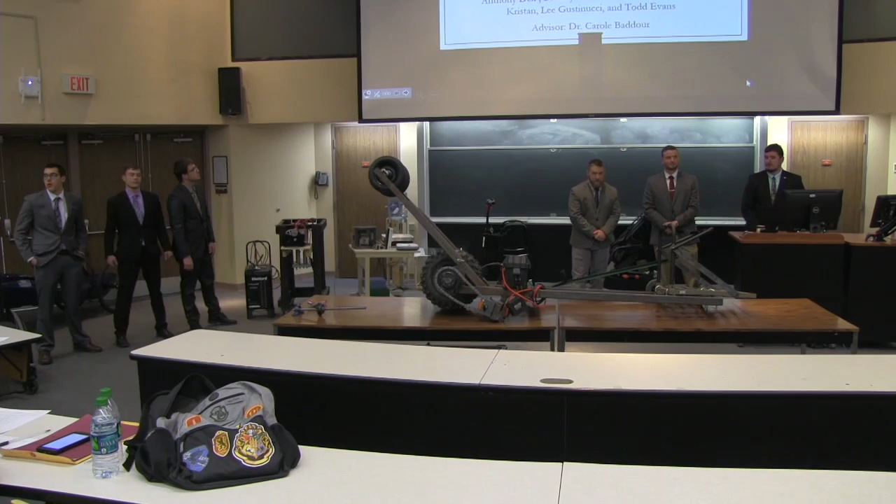The stands we have built, we wanted to create an electric-powered self-climbing tree stand platform. We're calling it a platform, not a stand itself, because it's a platform to hold the stand that each individual user would have too.

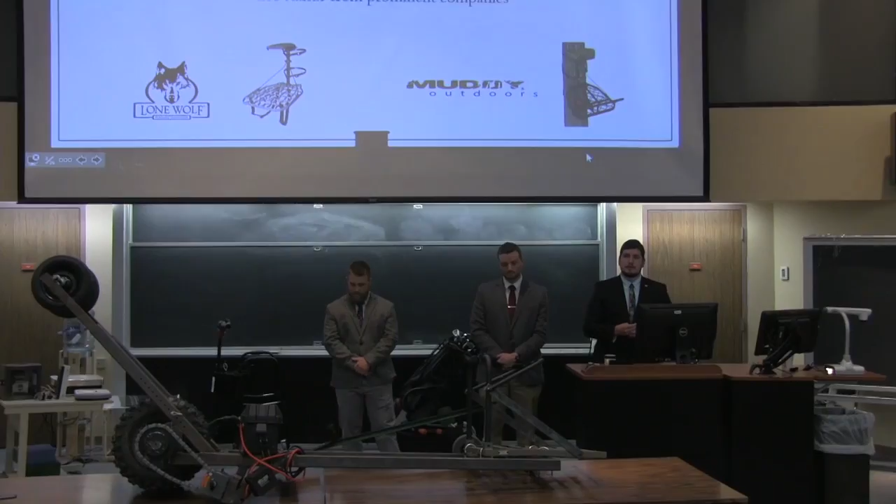We would like to be able to accommodate stands from prominent companies in the industry like Lone Wolf, Loggy Bayou, Muddy Outdoors, Summit. There are multiple different brands that make their own stands. Each is a little different, but our design is universal enough to accommodate all of those.

Today, there are 3 different major types of tree stands that you can use: ladder stands, hang-on stands, and manual climbing stands. The ladder stand is a ladder with a chair at the top of it, basically.

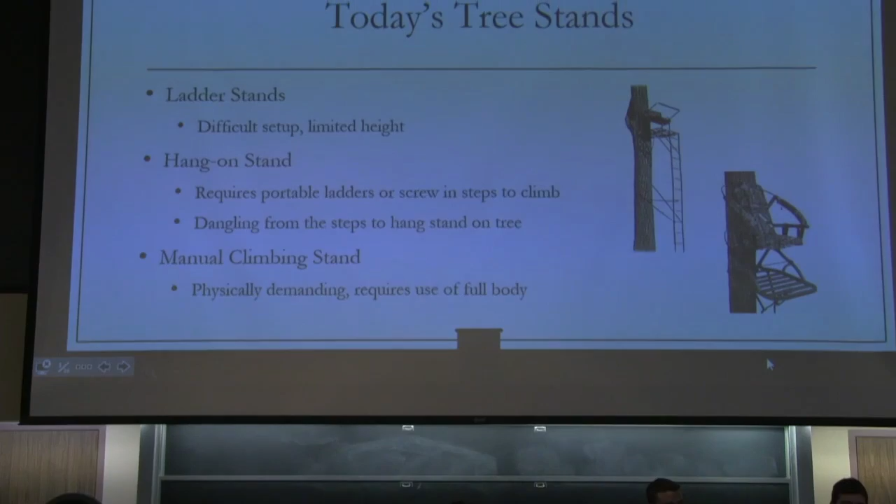You'd have to build it on the ground and then walk it, lift it, and walk it towards the tree, lean it up, climb up with it unsecured, wrap a strap around it. It's pretty unsecure, could be dangerous. Well, every stand is dangerous.

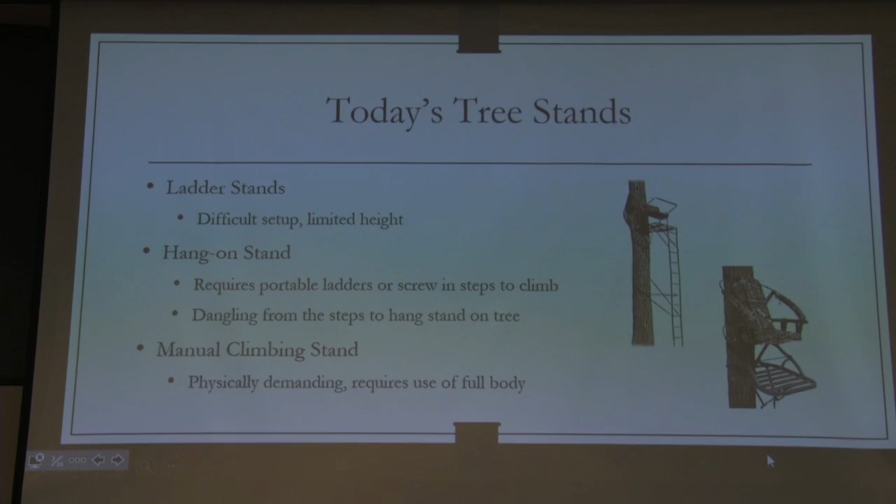Hang-on stands require the use of either screw-in steps or strap-on ladders or strap-on steps to climb the tree to your desired height, and then take the stand off of your back and hang it using a strap again. It's kind of hard to do.

Or 2-piece climber stands. There's a part for your feet, and then there's a part that has a chair on it. You would move the upper half using your arms, and then use your core strength and lower body to raise the lower half, to pretty much imitate an inchworm climbing up the tree. It's very physically demanding, and it's a little dangerous, but all of them are.

So to accommodate the tools used to hang other types of stands, we designed our Angel Lift stand, our motor-driven self-climbing tree stand platform.

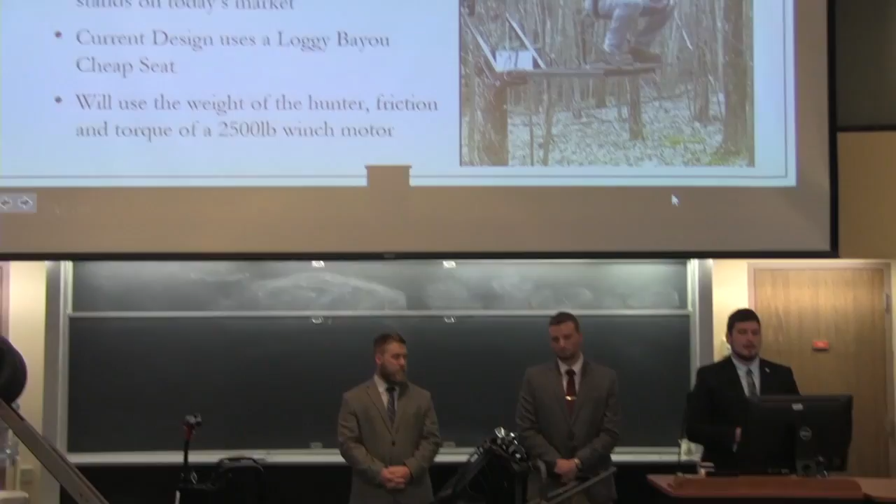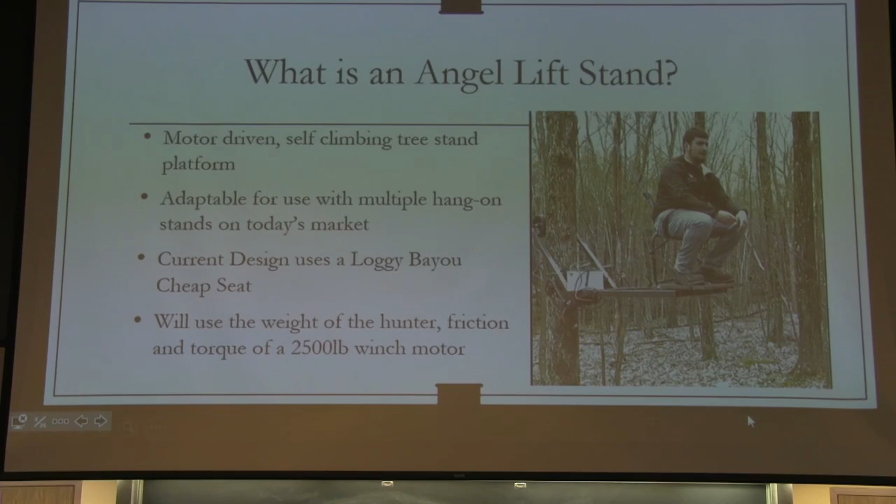We are currently using a Loggy Bayou cheap seat because that's what we had available to us. Most of the tree stands on today's market range from about $130 to $300.

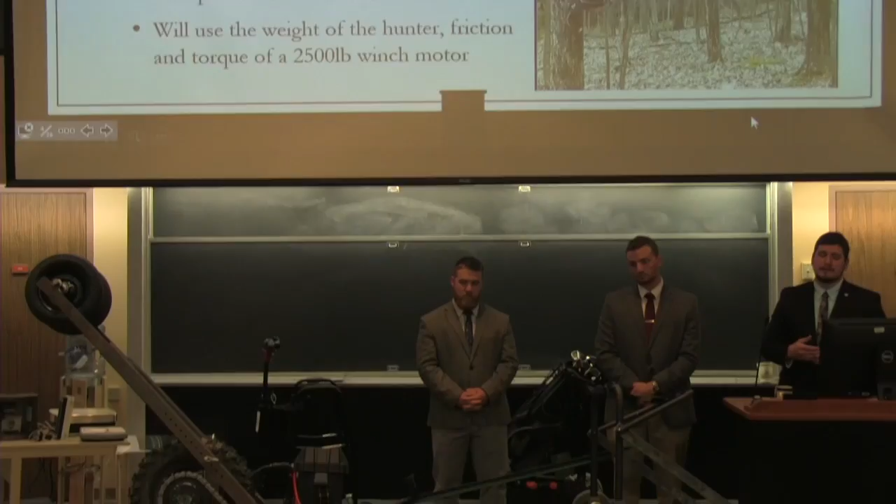It uses the weight of the hunter to apply a force into the tree, and that force into the tree allows the stand to climb itself up.

There's a picture there, I'm sitting on it. I'm only about 4 or 5 feet off the ground at that point, but it was raising me up. Me in those boots, fully dressed like that, about 270 pounds, so pretty decent weight.

So, just some specifications for our design. One of our goals when we were doing this project is we wanted to minimize the amount of damage that was done to the tree as it was climbing.

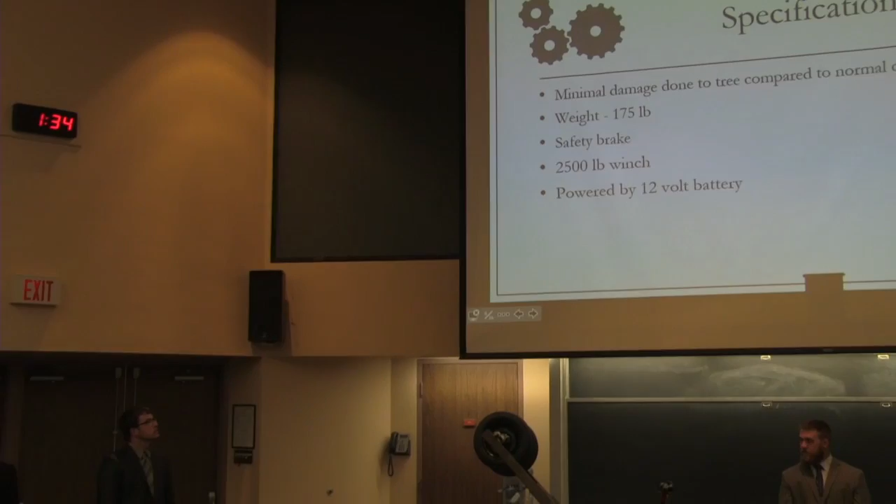And we were able to accomplish that compared to the stands that are on the market today. Bruce was mentioning the manual climbing stands especially do quite a bit of damage because they dig into the tree as you're climbing. Fortunately with ours, we were able to do minimal damage to the tree.

The tires, at the most, they scrape off some mark as it's climbing, but it's minimal. It's not something that's going to do any sort of long-term harm.

The weight of the stand ended up being about 175 pounds, so it's heavy as it is, but it's also overbuilt too. So we used big square steel box tubing because we didn't want to have to worry about structural failure. And we incorporated a safety brake too.

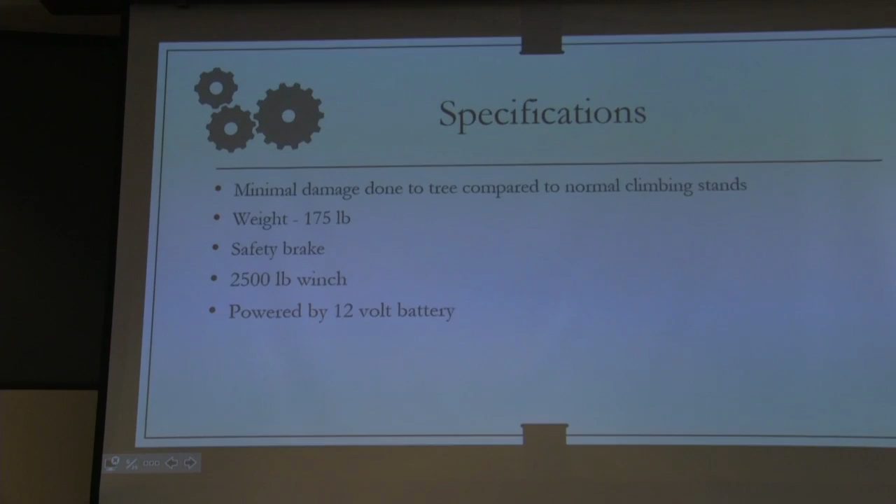So the electric winch has a dynamic braking system. So what that means is that as it's climbing, if you stop using the winch, the stand will stop as well because the winch has a built-in brake.

But we also made a safety brake, so in case anything goes wrong with the winch brake, you have a backup system and you won't fall out of the tree. And so the driving motor is the 2,500 pound winch, and that's powered by a 12-volt battery.

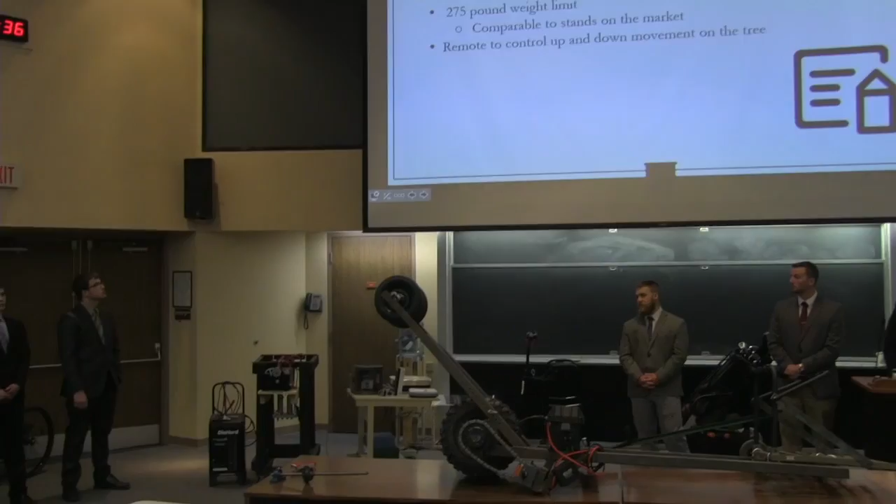Our weight limit is about 275 pounds, and as it's built, it's overbuilt, so that weight limit isn't because of structural limitations as it sits. It's actually because of limitations from the winch. If you consider the amount of torque required to climb the tree, you end up pretty close to the 2,500 pound capacity of the winch. That's why we have that 275 pound weight limit.

Structurally, you wouldn't have a failure as it's built at that point. And to control the winch, you just have a small remote, and you can go up and down with that. It's a little remote.

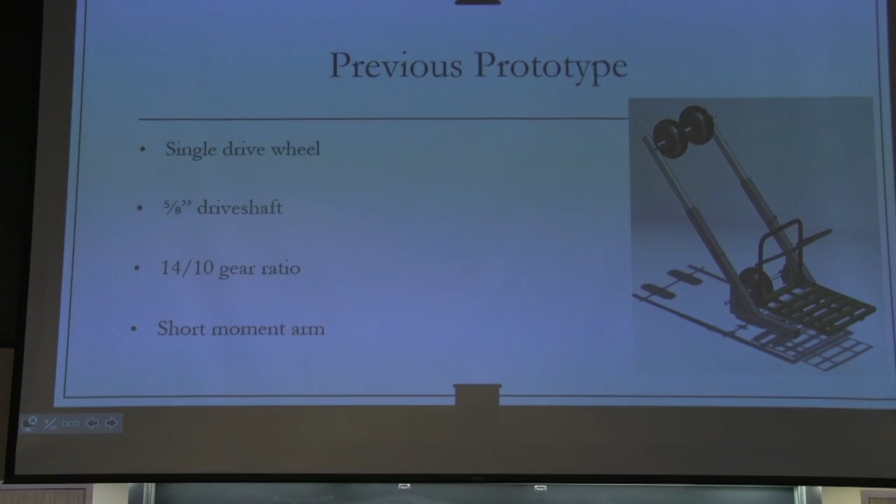Okay, so let's start getting into the actual design of the stand itself. This was the previous prototype that we debuted in the fall for those of you that were here. It started off initially with a single drive wheel design, mounted and driven by a 5/8 shaft made out of a round steel rod. We initially started with a 14 to 10 gear ratio, calculated based on the speed we were trying to achieve as it ascended up the tree. It had a lot shorter moment arm, or platform, which was probably the biggest design change you'll see coming up in the PowerPoint. We'll explain the reason for that.

It started out initially about 18 inches long, and you can see it on the tape out, fairly extended. Through our testing, we realized we needed a much larger moment, so we added that 4-foot extension off the end. We also found we needed more surface area to contact the tree, so we added a second tire. That also allowed us to have a centering function of the tree stand, which helped it become a lot more stable.

Along with adding the second tire, we had a testing failure with the old shaft, so we increased the diameter of the new shaft to the point where we were comfortable it wasn't going to fail on us. We added a brake, so that if anything happened with the chain or the sprocket, it's completely separate from the rest of the stand, meaning nothing will interfere with the brake stopping it.

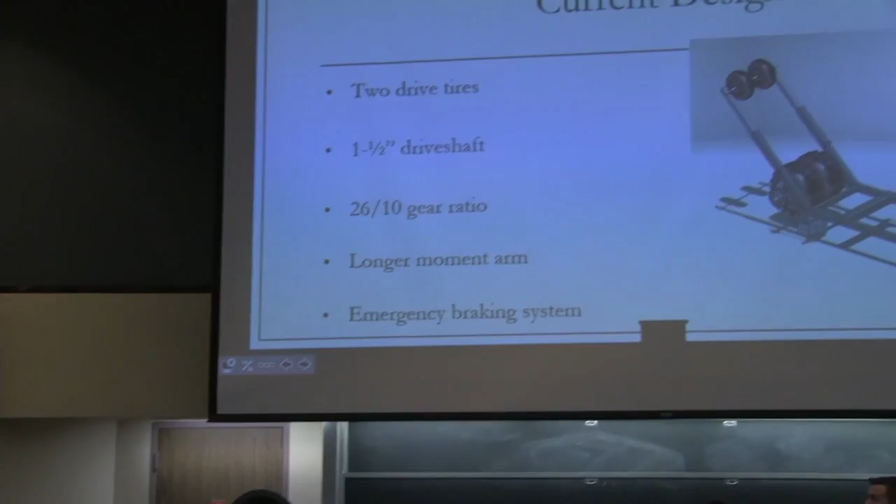We changed the gear ratio a little bit. Originally we designed it for the speed of going up the tree, then we realized we really needed to design it for the torque, so we slowed it down, it climbed a lot slower and more stable.

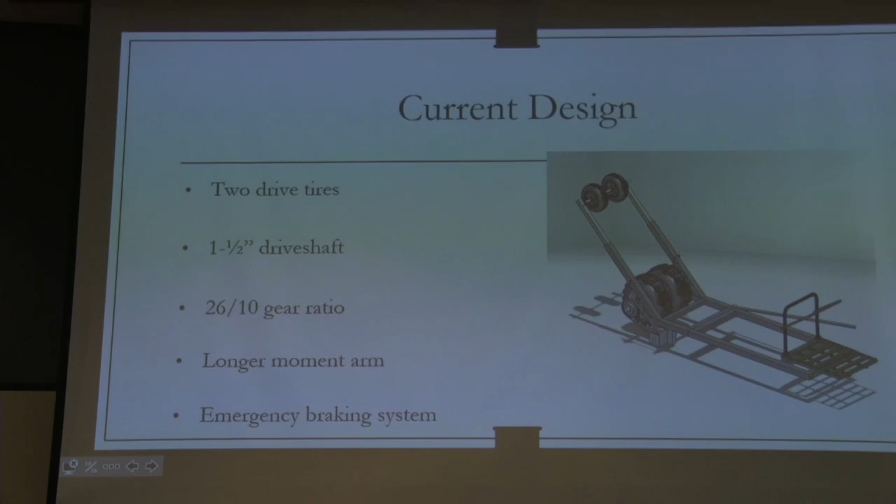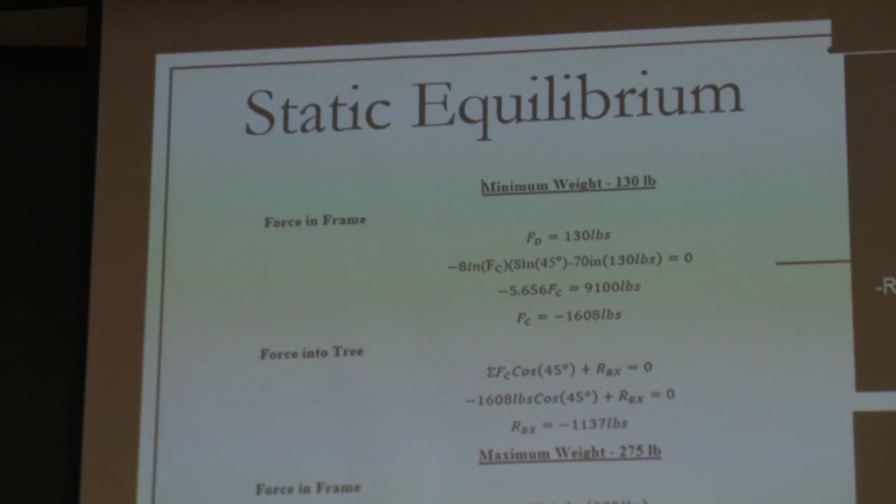Now we'll talk about the calculations we initially used to justify the concept we're trying to achieve. Here we see our static equilibrium calculations. These are used to give us our loading within the structure along with the force we were applying between the rubber tires and the tree.

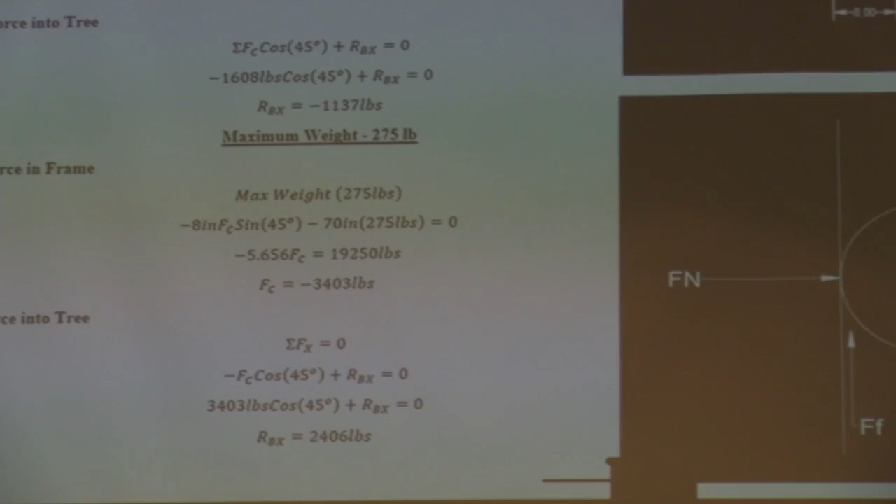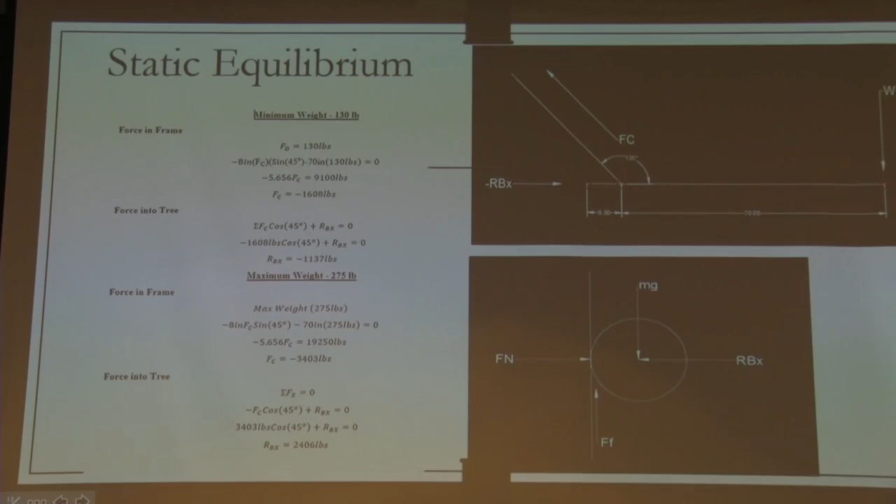We did a calculation for both our minimum weight limit and our maximum weight limit. Those numbers, 130 and 275, are based on our testing with the difference of how much the group members and myself weigh, all of us riding it. We started with our maximum weight limit of 275, based on Bruce. It had no problem taking him up the tree, but at that point we didn't want to push it much more than that.

Due to other testing and adding separate weights on the end of it, we figured 130 would be a comfortable minimum weight that would still allow the stand to have enough of a moment to grip the tree and safely ascend you up. As we did the calculations, you can see the loading in the arms that are holding you ranges from 1,600 to 3,400, depending on between your minimum and maximum.

The force between the drive tires and the tree ranged from a little over 1,100 to 2,400, depending on between your 130 and your 275 pound loads. Initially, they were a lot lower with the lower moment arm, but we thought it was going to be sufficient, but we had to add more to it to get a lot more force to ascend the seat.

So with the larger moment, we thought it'd be a good idea to reanalyze the potential modes of failure for our system.

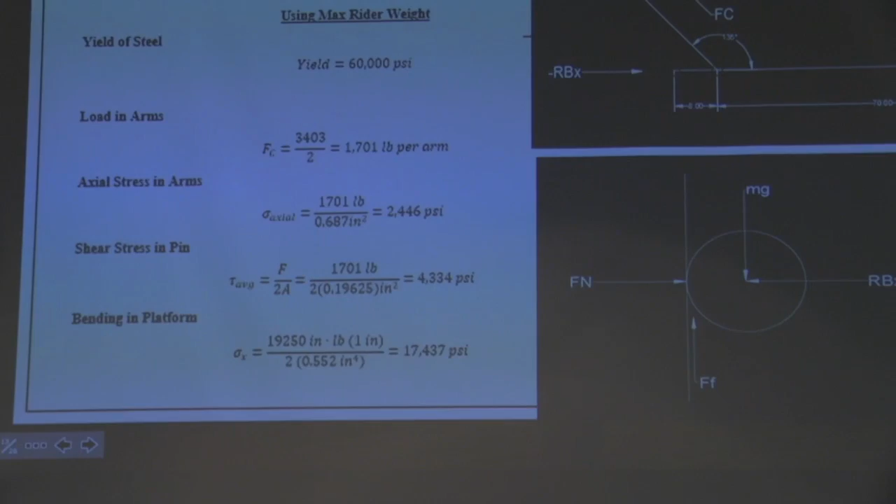The yield strength of steel is 60,000 psi. So we looked at various portions of the stand, such as bending in the platform, shear stress of the pins, and the axial stress that's in the arms.

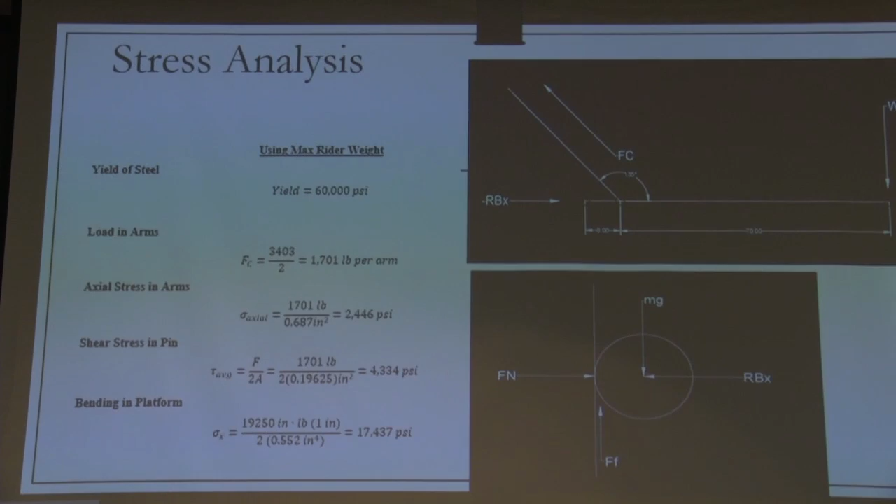Our stresses were much lower than what the yield is. The worst safety factor is about 3.5, which is on the bending. So we're pretty confident that our system's not going to have any issues carrying out the weight that we intended it for.

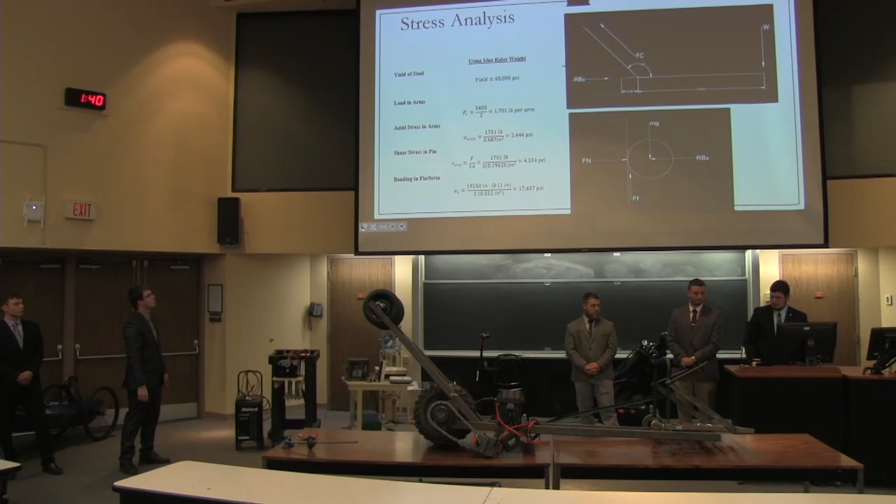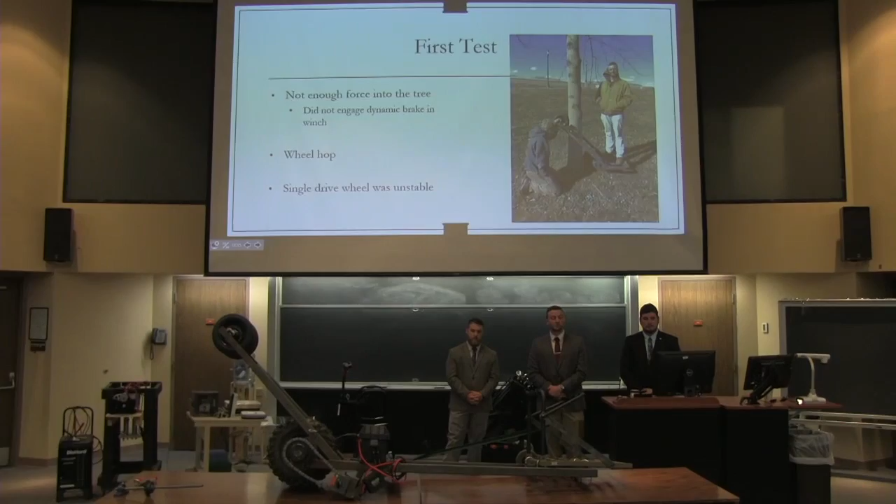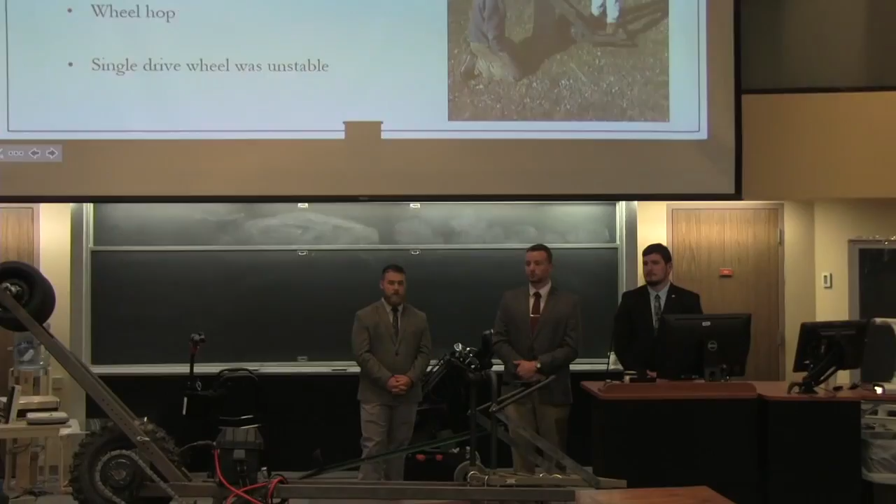All right, so now we're going to get into testing. After our first test, we noticed a few things that were going to be problematic. The first thing we really noticed was the actual platform of the stand was going to be too short, and this caused more force to go straight down instead of into the tree, which caused the dynamic brake in the winch not to work properly.

Another thing was the 14 to 10 gear ratio we were using was trying to ascend too quickly, causing the drive wheel to hop. And another thing is the single drive wheel just wasn't stable enough and tried to kick out to either side of the tree.

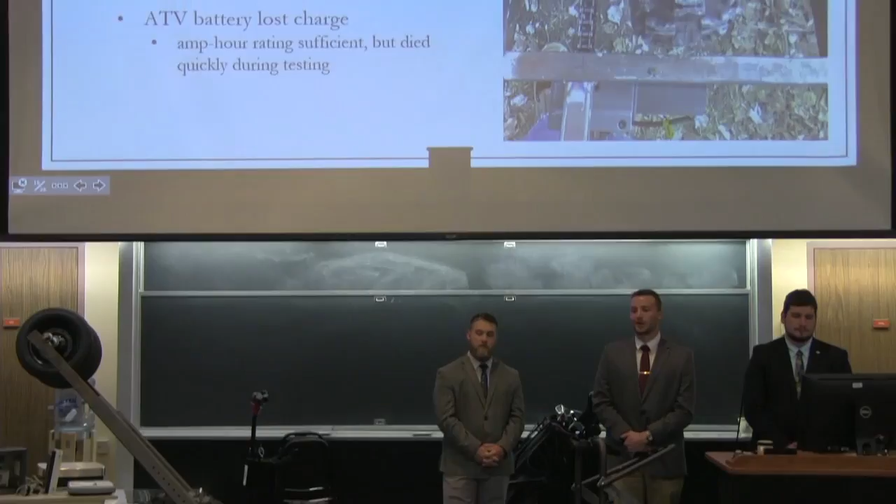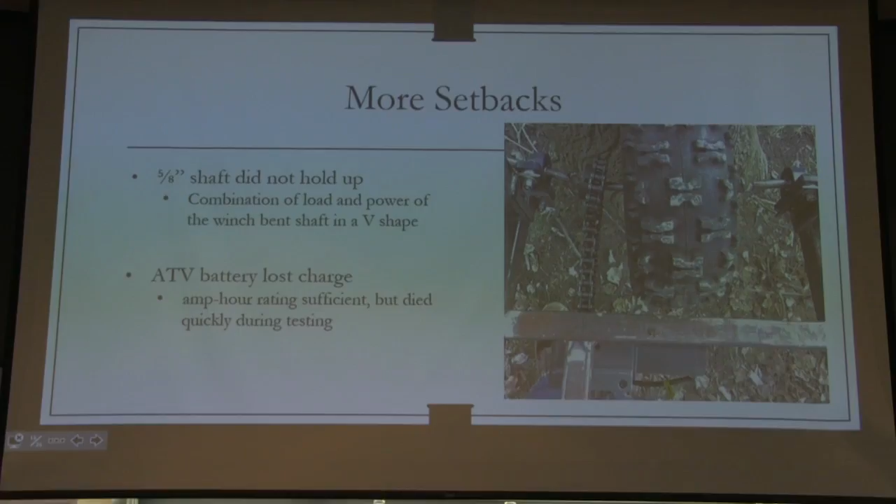Also, the ATV battery that we were originally going to use didn't have enough life or cranking amps in order to get it up the tree multiple passes. So we ended up going with a car battery instead.

All right, so even though there were some problems, we were able to get over every single one that we ran into. As you can see here, not very well, but this was the length of our original design. Now we extended this 4 feet.

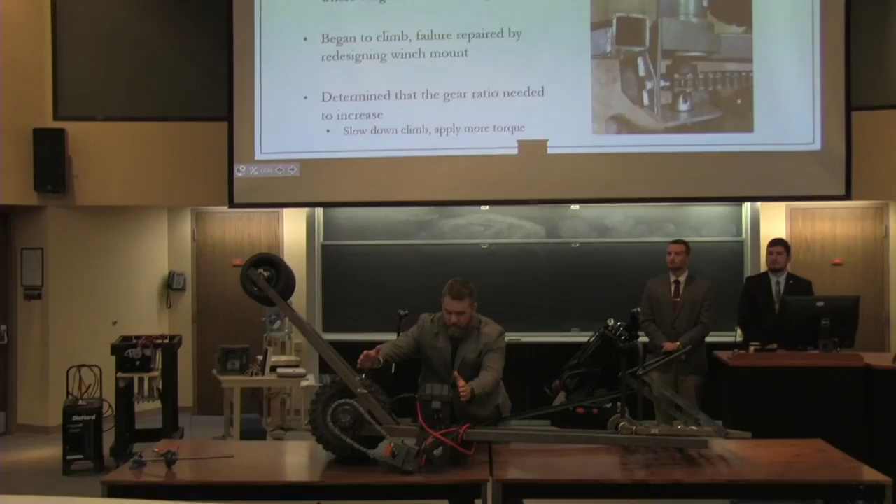In order to decide how much we actually had to extend it, what we did was we took a pry bar, stuck it in the original stand, put different weights in different increments, and then decided okay, you know what, 4 feet is what we need. Went to the shop, designed a 4-foot piece, threw it on there, and it worked flawlessly.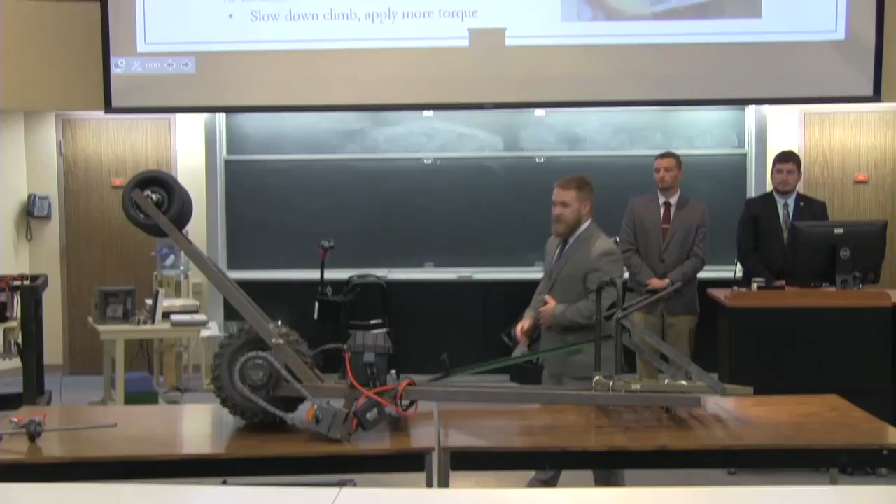Another issue that we ran into, which you can see here, was the bracket for the winch. It wasn't built strong enough. It wasn't big enough. It wasn't beefy enough. So what we did was we added a couple supports, which you can see where this box is mounted here, which added the needed support that this prototype needed in order to work properly.

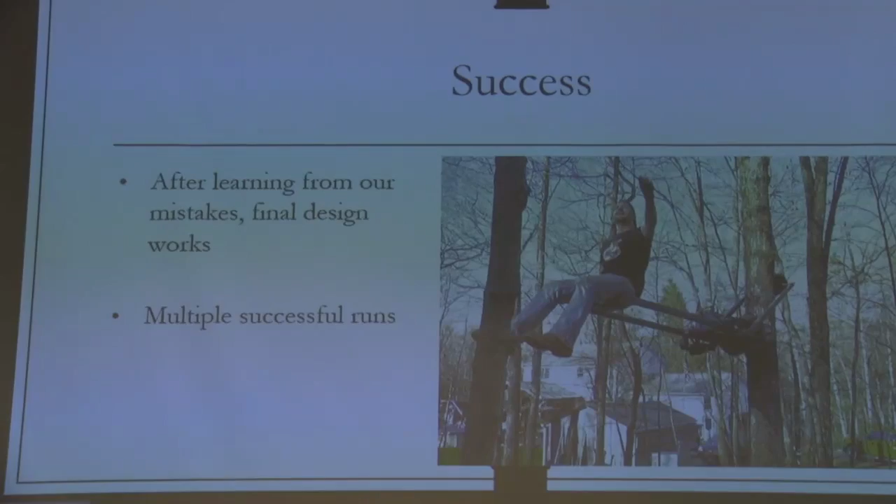So once we did all of that, we had our prototype working. It was climbing up trees. It wasn't just climbing up a tree, it was climbing up multiple trees, multiple different times, multiple parts. It was a success. We had a couple issues, we were able to fix them, and we had to climb up multiple trees multiple times.

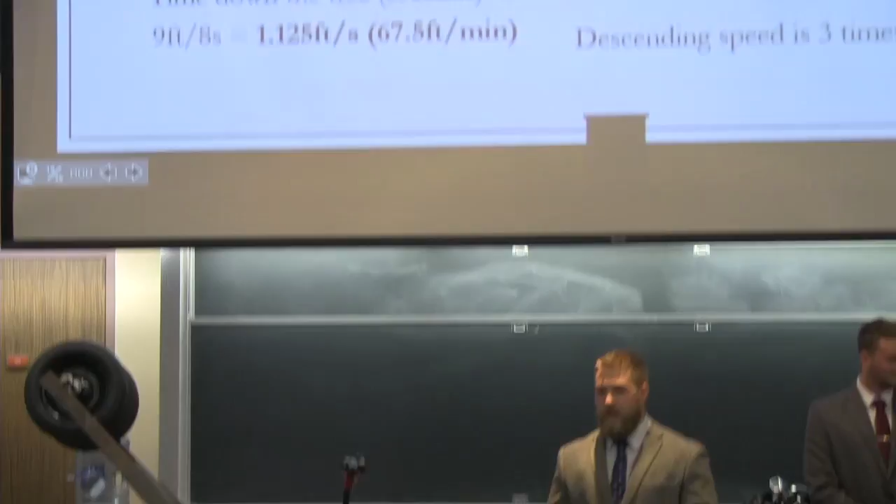So once we had this thing working to our expectations, we then decided, all right, now we have to do a couple more calculations. We have to decide how fast is this thing going? How well is it actually working?

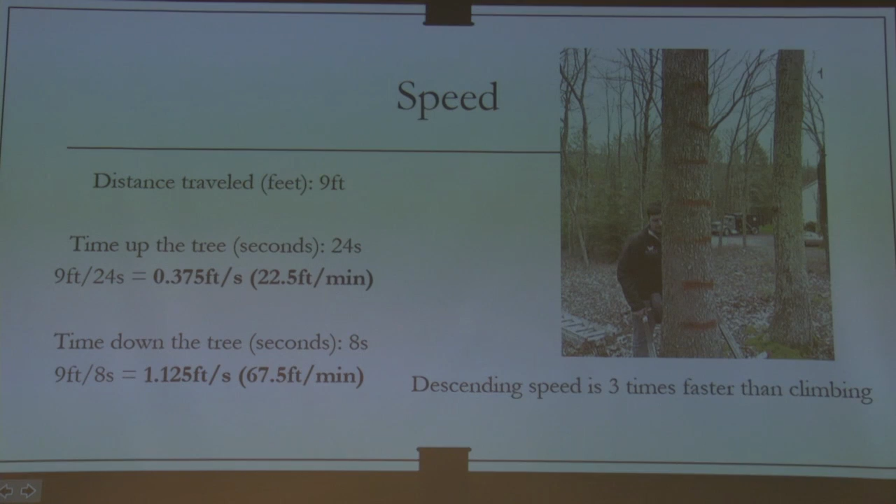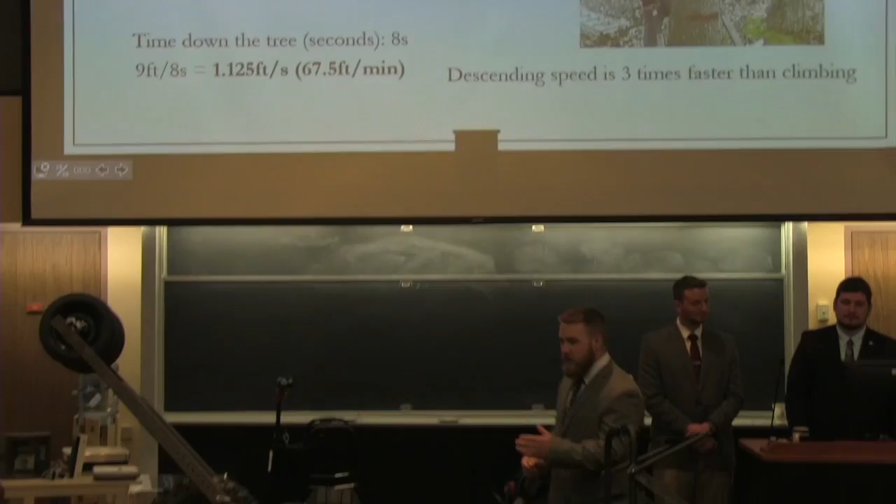So what we did, as you can see in this picture here with Bruce behind me, we have foot increments spray painted on the tree. We took this tree stand up with Lee on it, 9 feet. It took us 24 seconds to go up 9 feet, and it took 8 seconds to go down.

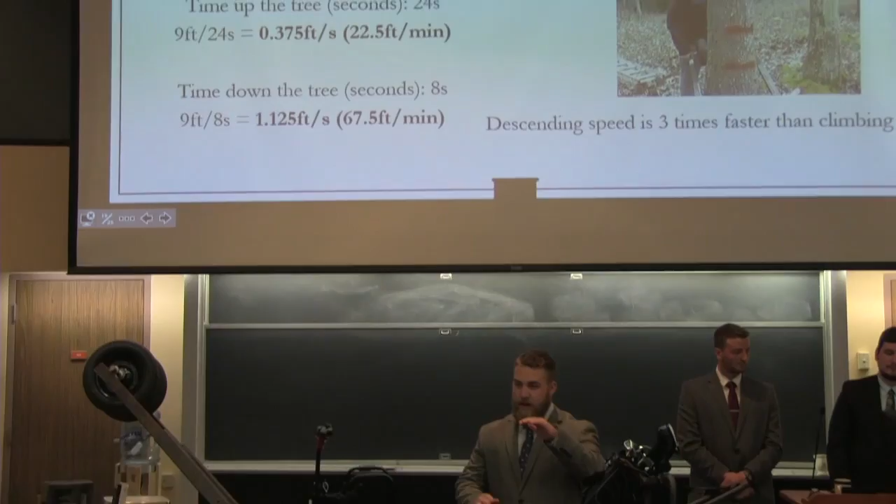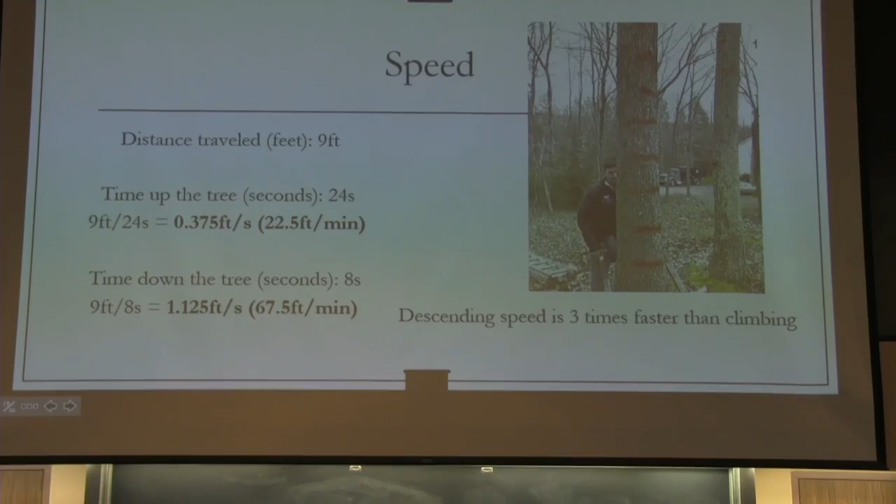With those math calculations, it actually takes it is 3 times faster coming down due to gravity force, which is another reason we integrated this braking system. So if somebody up there like Lee, who's a little shaky at the legs, has a hard time coming down fast, he can sit in this stand, and these brake levers right on your left-hand side slow it down, so you can go down at a safe speed.

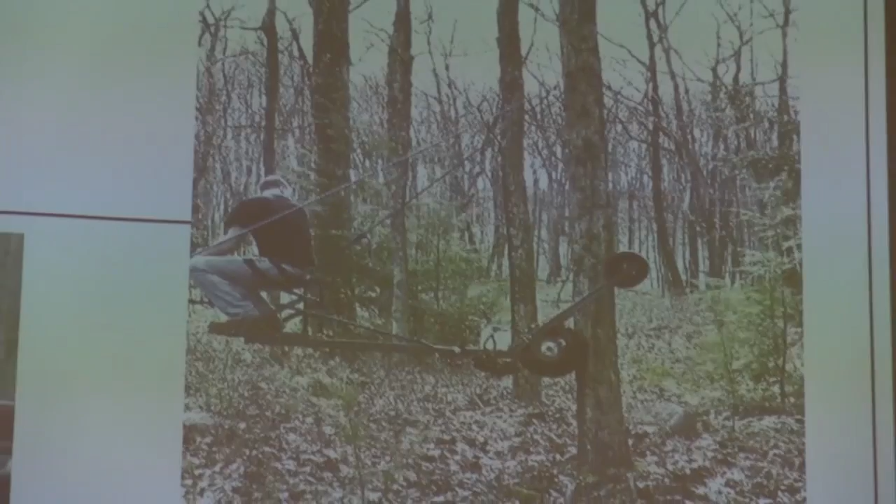We have a video here. This is Dan on the tree for video length purposes. You didn't go very high, but we got him to go up the tree safely, of course, with our climbing device. And once he gets up a little bit, he stays seated and goes to full draw and shoots at a target.

Both of our archers that shot during testing have been hunting for many years, shooting bows for many years, so great shots. No arrows were lost, no animals were harmed, so you're aware.

And then at the end of this video, it rides back down, and you can see how much faster it goes down compared to going up. But Dan was brave.

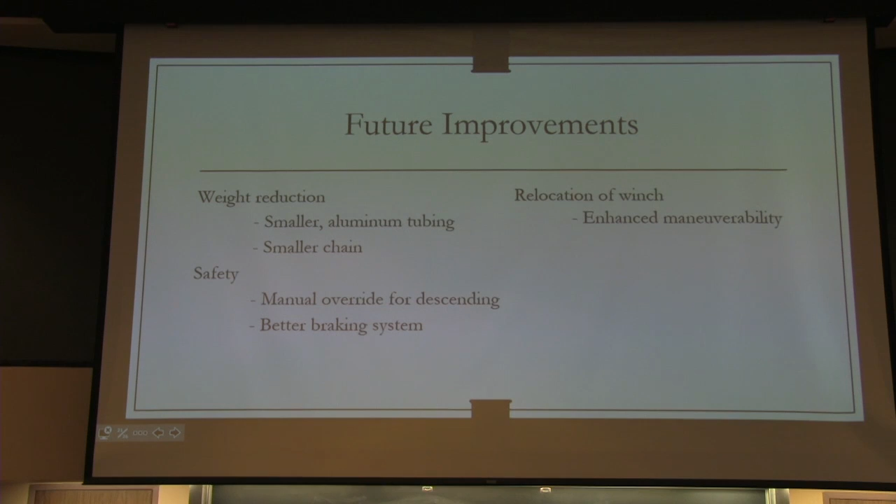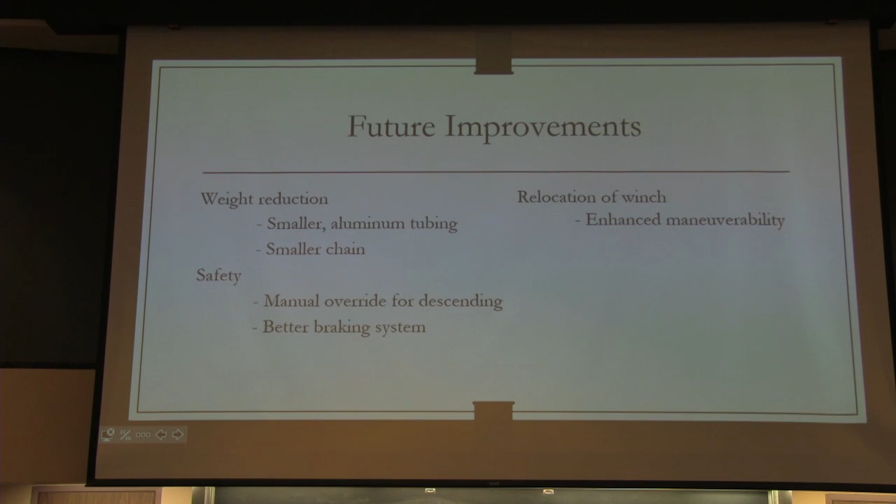So some future improvements that we want to make to the design: we want to reduce the weight of it by quite a bit. Right now it's very heavy. To do that, we could use smaller aluminum tubing. We thought about doing that initially, but aluminum is very expensive, and we were more concerned about proving that we could make the stand climb up the tree than about the structure of it. So in the future, we could use aluminum tubing and make it a little bit smaller to save some weight.

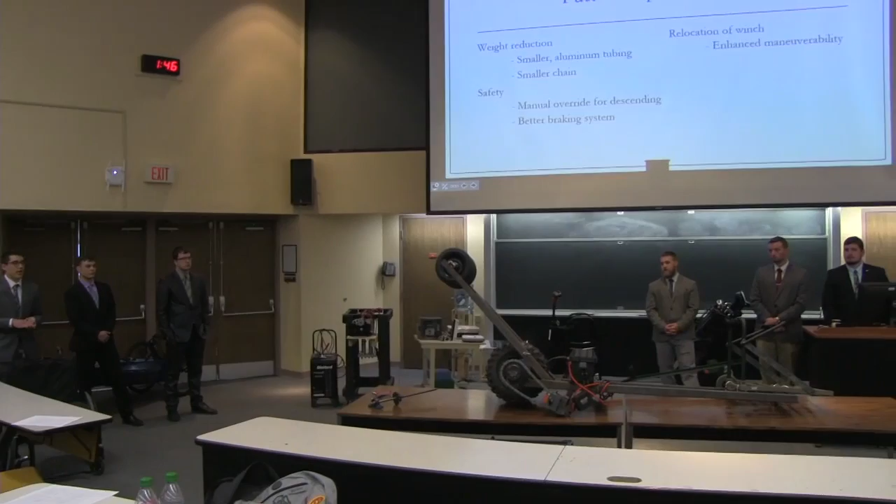And some extra safety considerations too. We want to have a manual override for descending. This is something we didn't get a chance to design, but we were hoping to make it so that once you get up to the top of the tree, if there's any problem with the battery or the winch for any reason, you're not stuck up 10 feet in the air. There'd be something you'd be able to descend with, maybe some type of manual crank. So that's an improvement we want to make in the future.

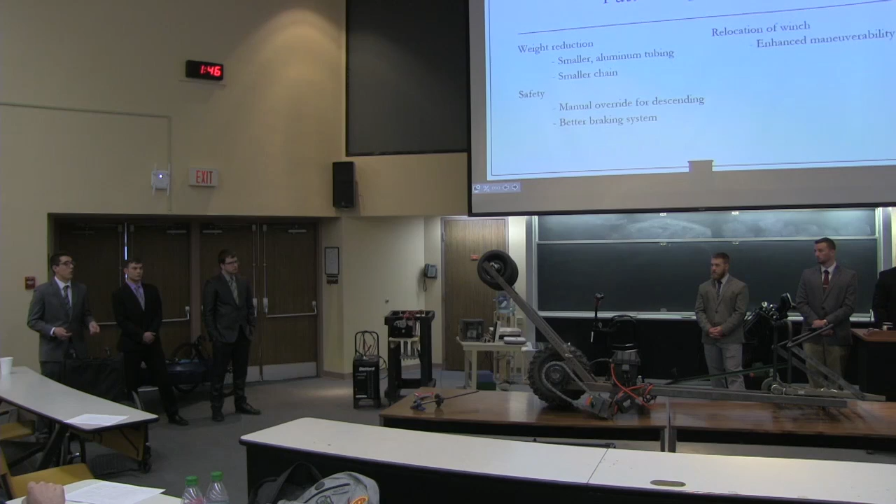And we want to improve the braking system too. The way it is right now, it doesn't lock into place. We want to make it so that it's essentially like a parking brake, so you can get up to the spot you want to be, and then lock it in place so that in case anything goes wrong with the brake on the winch, you have that extra lock. Right now the braking system works, but it doesn't lock into place, so we want to design it so that we can lock it in place.

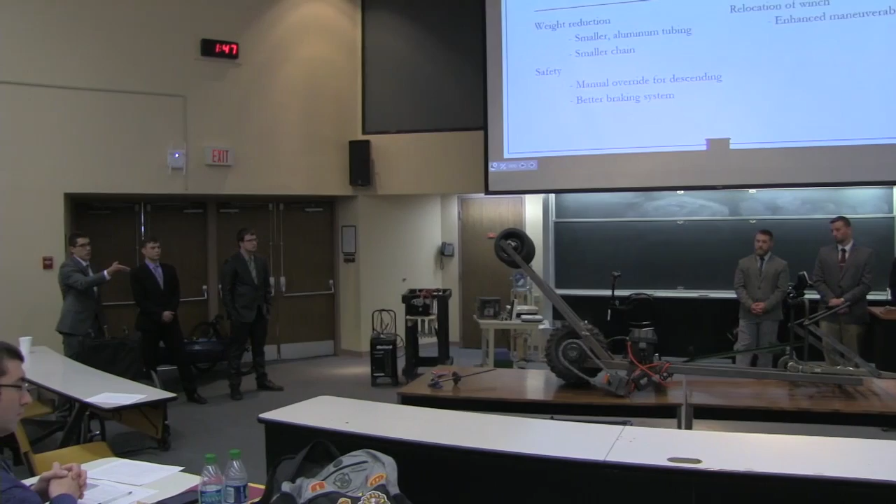And then just a simple thing, we want to relocate the winch. It's located underneath the frame right now, and we would want to put it on top. We have room for that now, and that would just make it easier to move around.

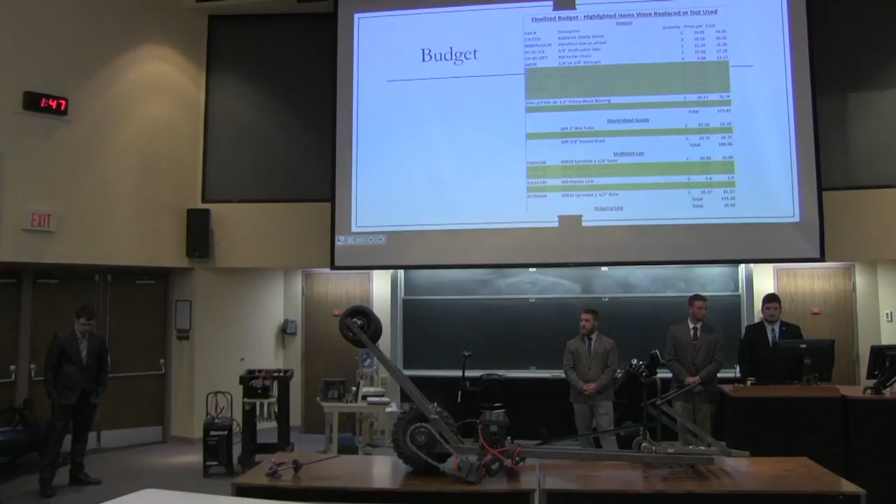And here's a summary of our budget. As we were going through testing, we had a couple part failures, so some of the parts we ordered, we didn't end up using in the final test. An example of that is the smaller axle sprocket that was on the table. We had to buy a bigger sprocket to increase the gear ratio. So some of the parts we ended up configuring differently throughout testing.

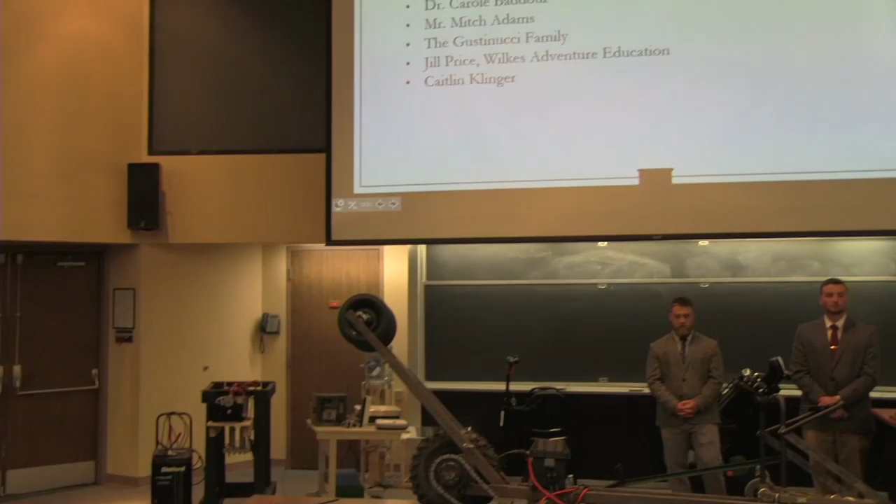I'd like to give some special thanks to Dr. Carole Baddour, our advisor. She kept us on track all semester long, made sure we were getting stuff in when we were supposed to, and making progress on our design and build.

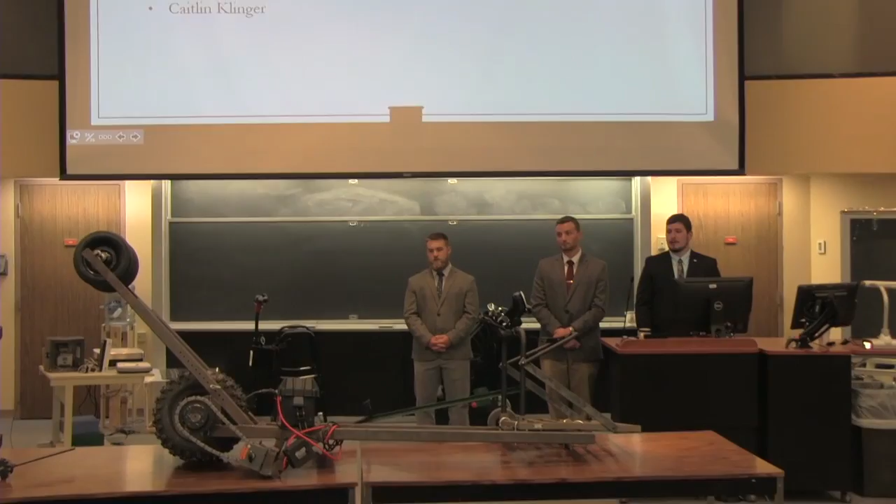We'd like to thank Mr. Mitch Adams down in the machine shop. If it wasn't for him, some of that wouldn't be where it is. A lot of these projects here wouldn't be sitting in front of you.

We'd also like to thank the Gustinucci family. They were very kind to let us use their property for testing purposes, because there aren't very many trees on campus.

Unfortunately there was a lot of rain on the days we tested. It still worked in the rain, but we didn't make videos of those days for other reasons. While it was raining, they let us hang out in their garage and wait out the weather.

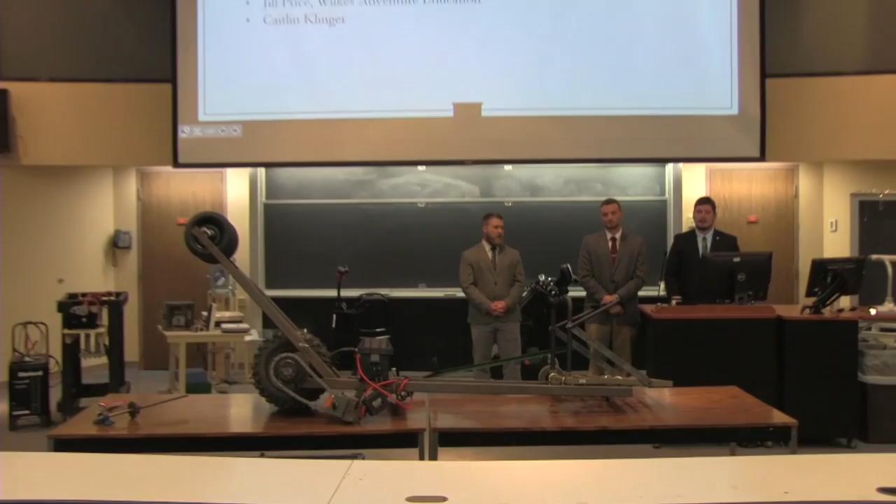I'd like to thank Jill Price from Wilkes Adventure for giving us the belaying device, and we'd like to thank Caitlin Klinger for coming along with us and belaying while we were doing our testing.

For references, we pretty much used all of Dr. B's notes in class. And that's about it.

Great job, guys. I think you really encapsulated what the spirit of senior projects is in a lot of ways - you do the analysis, the physical build, the testing, and I think you had fun with it. I'll be the first to admit I didn't think you would work last fall. I didn't think you would get up the tree. So, great job proving me wrong.

I have a technical question for you. Why does it have a 45-degree angle, and why isn't it all just on the horizontal plane?

That's just where we started. Yeah, depending on the diameter of the tree, you can adjust the arms depending on whether it's a large or small diameter. Based on the calculations, that's where we started. Once we figured out the frame needed to be extended, it was going to take too long to rebuild all that and try to change it to 60 degrees or even lower, which would give us less length in the frame itself while still getting the torque needed. So we ended up just leaving it where we initially started, just for time reasons.

Would it still work if it was all horizontal? No - that's really what's giving you the stability. If you look at traditional climbing tree stands today, they have a cable in the back which is higher than the base, which is the exact same concept we tried doing here. So the force going into the back of the tree has to be higher than the force on the bottom, which keeps your platform from sliding backwards or down. It gives you a lot more stability on the bottom plane.

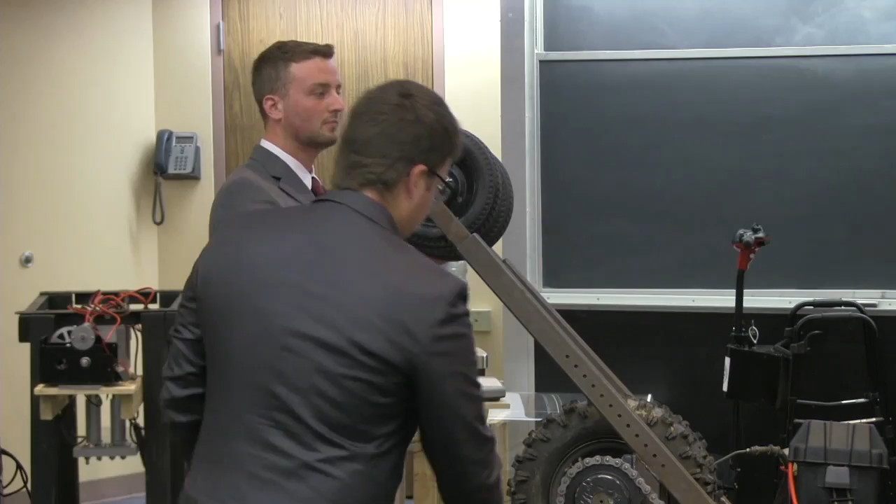There's a remote that came with the winch. Pretty much you press the out button, it climbs up, press the in button, it shuts down.

Very good job, very good comments, accurate engineering comments, that's really good. So I'm really worried about the winch - what if you stay up on the tree for 30 minutes, so the winch is idle? Is there a clutch there or something, how is the motor?

Because when the motor is not running, we know DC motors, right? So if it's not running and it's just braking, it's not going to be very good. So is there a clutch in the winch or something?

Planetary gears - they all back off in the opposite direction, no matter what. So actually, if it's not moving, the motor is not moving, right?

Right. So my question is, will the motor get caught - or I guess maybe you don't look into that because it's a commercial winch? It never did - in all the testing we did, they had me up 14 feet in the air, and nothing ever got warm on us.

One final question - did you ever do a failure test, where you're up in the tree and cut off the power, to see what actually happens? The only time the winch is powered is to go up, then it's not powered, and then it's powered again when it comes down.

So again, if this becomes a commercial product, you have to do that failure test first. You really have to check when you're up there, somewhere in the middle of traveling, and cut off the power - what actually kicks in? Okay, thank you.